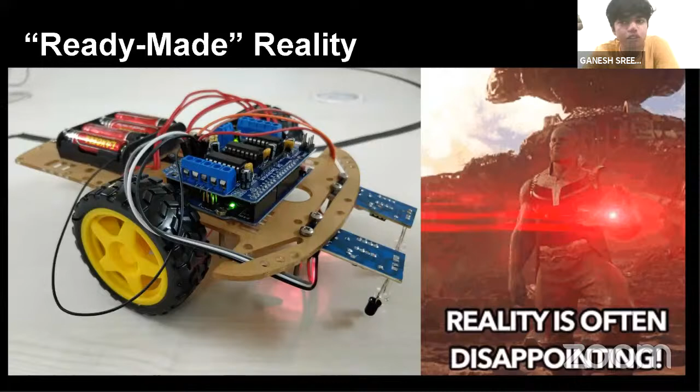But then comes the reality part, and that's the thing about reality — it often sucks. Before joining engineering, you dream about robotics, watching Terminator and Iron Man with high hopes. Once you join campus and spend 4 years learning what you love, you end up making a line follower robot, which is actually something you should be making at 12 years old, in 6th grade.

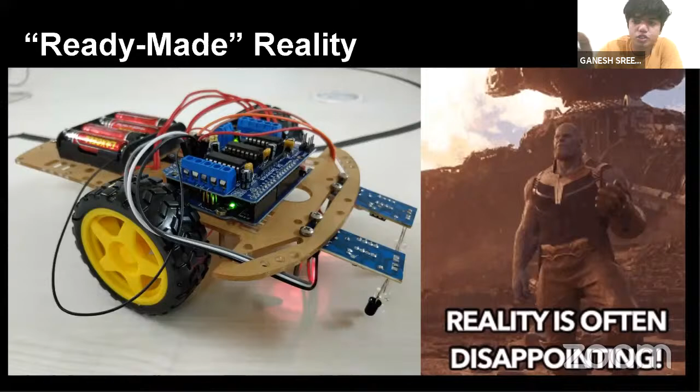Since I have all these pop-ups from Zoom on the right side of my screen, I want to make sure that's not visible on anyone else's screen. Jijo sir, is that Zoom dialog box visible too now? I guess it's not, right? No, it's all okay.

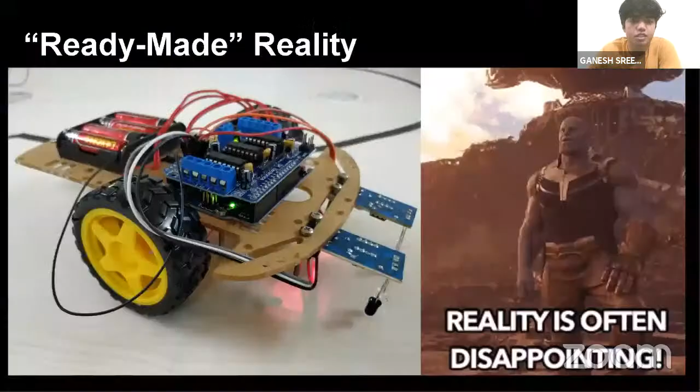I'm not saying this is the reality — I'm saying it's the ready-made reality. This is what they'll sell you when you join a 3-day robotics bootcamp or workshop. I'm not selling a program here; I don't teach robotics anymore, but I'm just saying.

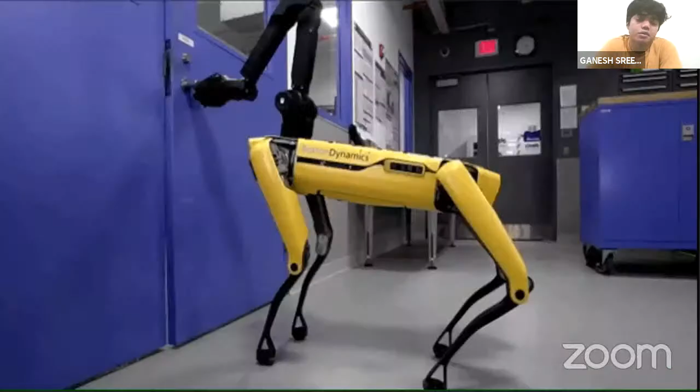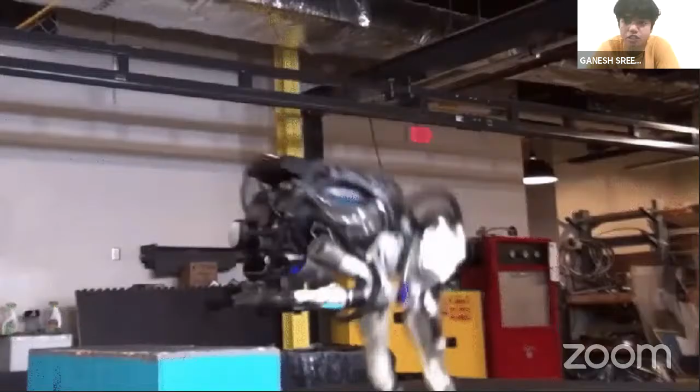There's a whole other spectrum of robotics you see on the internet — Boston Dynamics, Spot Mini, the bigger and better Atlas humanoid, and more. It involves a lot of mechanical engineering, electronics, computer science, and algorithms running in the background, with a little AI. Contrary to popular belief, it's not really AI — even Boston Dynamics robots are pretty much well programmed in ROS, and we'll get to that in a moment.

Even some practically oriented robots, like Elon Musk using robots to assemble plants, or Volkswagen doing the same for over a decade — you don't always have to look at Tesla for inspiration. There's also KUKA robots, a lot of robots coming from Germany.

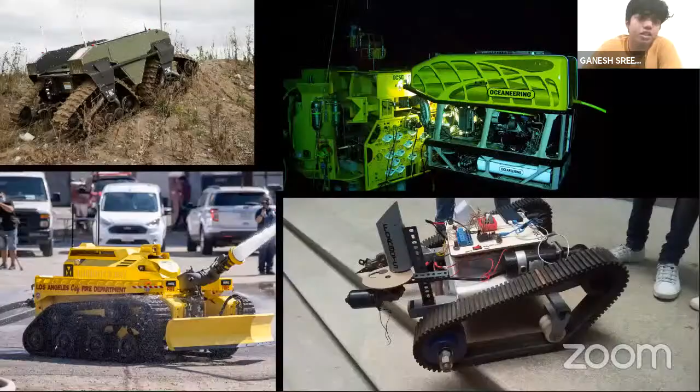Then there are unmanned ground vehicles, which is my field of expertise — the ones you see on the top left and bottom right corners. The fourth picture is actually my robot that my team developed for the first hackathon.

Most of my seniors worked on it, mentored by Dr. Sojan and Assistant Professor Robin sir, who I hope is also here in this presentation. There are also aquatic robots for underwater inspection, which is yet another domain I'm working on.

I don't plan to bore you by telling you everything I've been doing, because that's not the point of this presentation.

I'm not here to talk about general robotics, because these are the things you find online and everyone's going to talk about. So I'm just going to tell you, even if you're not interested in robotics in general, you probably need to learn it. One reason is because it's perhaps the easiest way to add a lot of skills to your armamentarium, especially if you don't have any experience doing interdisciplinary projects beforehand.

What I mean is that if you want to make a robot, you will have to solder something, learn how to design a circuit, learn how to program, and learn how to screw down a wire or rivet something together. So these are the things you want. It's all about interdisciplinary skills, and it's not as simple as it sounds. We'll get to that later on.

And the stuff you learn in classroom, you get to apply, and that's for me the best part. Because if it's not really inspiring, then who wants to learn all these abstract subjects that you learn in classroom without even once applying anything in the real world?

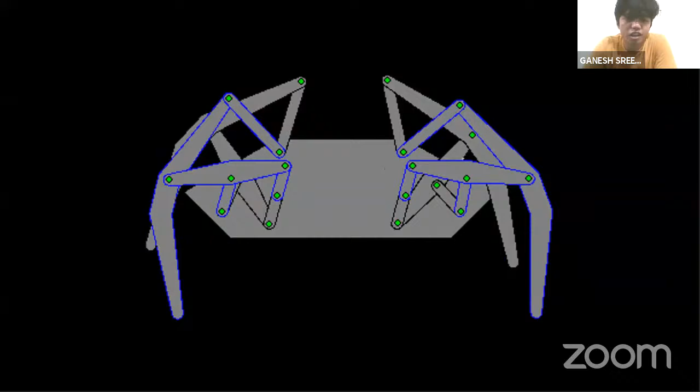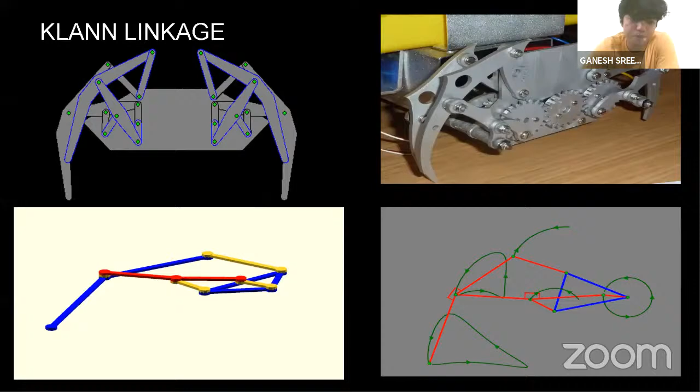It doesn't even have to be this complicated. Right here you're seeing a simple mechanism called the Klann linkage, which you will find in most quadruped robots these days—well, in the olden days. In fact, that's a single degree of freedom system. Having more degrees of freedom doesn't mean the system has to be complicated. It can be a very simple, unsophisticated system. In fact, it has only one rotational joint.

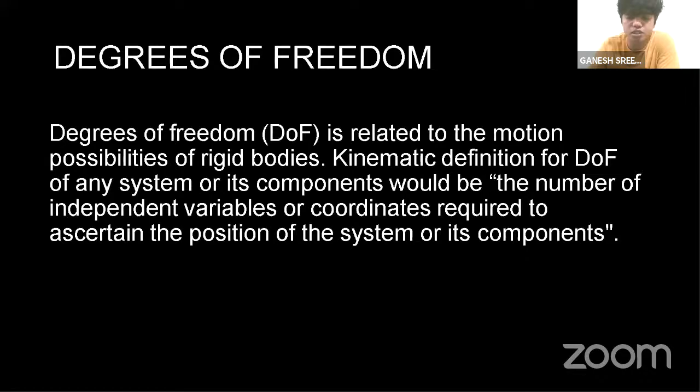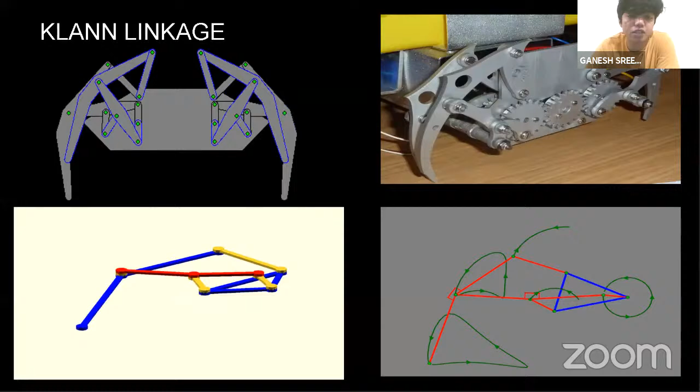So what do I mean by degrees of freedom? How many times does one thing need to rotate to prescribe the desired motion? In this case, the Klann linkage only needs to rotate about that red member you can see in the image in the left bottom corner. That's a simple mechanism.

So we are not going to talk about that. We're going to talk about how to describe motions in space, or motions of a robot, mathematically, because once you're able to describe it mathematically, you're then able to program it on a computer.

There's yet another thing I really want to point out. I don't mean to scare you off with any of this stuff. You can actually learn robotics without even worrying about all the mathematics involved, pretty much like you don't need to know image processing to use Photoshop. But if you really want to know what's going on under these codes and blocks and programs that you steal from GitHub or Stack Overflow someday, then you have to understand the fundamental theory behind how these things work.

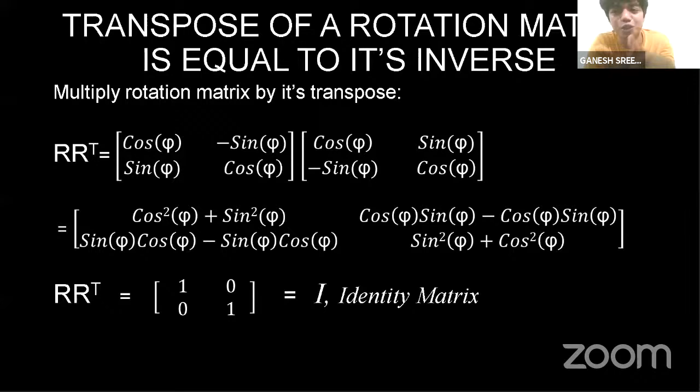So that's just a result. I mean, that's not a derivation part. It's actually fundamentally important when you code a robot. But again, that's beyond the scope of this presentation, so we're going to just skip ahead.

And we have yet another property of the transformation matrix. Once you multiply the transpose and the matrix itself, we get the identity matrix. And we know that the inverse also gives us the same. So a rotation matrix is also orthogonal, because its transpose is equal to its inverse.

So those are the properties of matrices which you actually need to brush up, which I hope you remember from your 3rd semester linear algebra course. I don't know about the first years right now, I think you guys are learning, right? First years and second years, the syllabus has changed a little.

So rotation between reference frames, it's all about matrix operations. You take inverses, you take transposes, that's all. So what I want to tell you is that, okay, this is actually supposed to be a 5-hour course, but that's not what we are doing today, so I'm just going to skip ahead.

But the point I'm trying to make is that once you know the elementary matrix operations, you can describe the motion of a robot. And how do you do it? You code it in MATLAB. And those are the things that Reshma ma'am already discussed in yesterday's presentation. And I'll tell you how to learn all these things on your own later on in this presentation.

And these are some interesting properties of rotation matrix. Its determinant is one, a lot of things. So what does the determinant mean? It's the area that's spanned by the unit vectors.

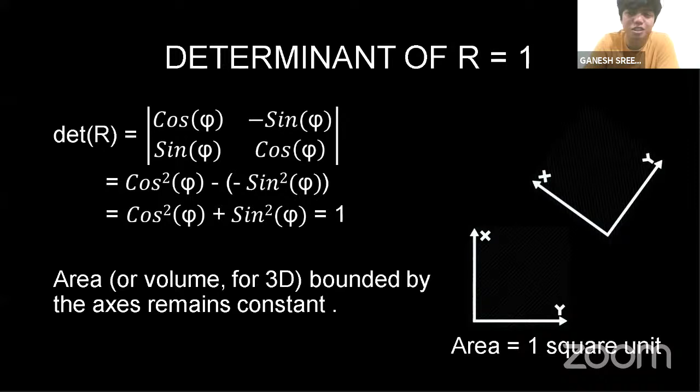But again, that's the physical interpretation of linear algebra. Those are things you don't really learn in your classroom, but you can learn from robotics. There are actually courses from Stanford University you can take to understand these things. The rotation matrix and its inverse belong to the special orthogonal group, which is yet another property of the matrix.

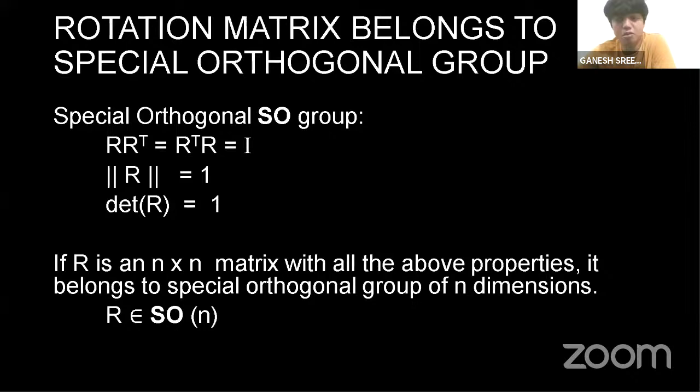There is invariance under rotation. Even if you rotate an element, its length won't change. That's all there is to it. But how do you mathematically represent it? If I'm rotating my arm, it's not getting shorter, right? Maybe it can go like this, squished and short, and as it rotates it elongates. It doesn't work that way, right? Once you rotate it, the length doesn't change.

So how do we prove it? Well, the vector's Euclidean norm remains the same. So I'm just talking about how to mathematically describe all these things.

So now we get back to the application part. How do you actually tell a robot to pick up an object? Or it doesn't even have to be a robot arm. Suppose you're making an automated car, okay? I've worked on a project, an amazing project by my seniors, and I've been lucky to be a part of it. I was the guy in charge of the automation part, but I wasn't quite successful in making the car autonomous. I ended up relying on image processing and stuff.

But how do you make a car autonomous? Well, it's not a solved problem yet. Even Elon Musk can't seem to do it yet. Well, one of the ways is that you know the relative position between the car and the destination. Then you think of all the possible ways you can reach the destination and choose one.

So how do you make a robot arm do the same to pick up an object using camera data? You've got to know all the velocities in relation to each other, right? And you can always transform between reference frames. Even if you rotate a reference frame or move a reference frame, you can still find the original coordinates by applying an equivalent matrix transformation to the distorted vector itself. And these vectors do not actually change in magnitude, so you can be confident about the results that they yield.

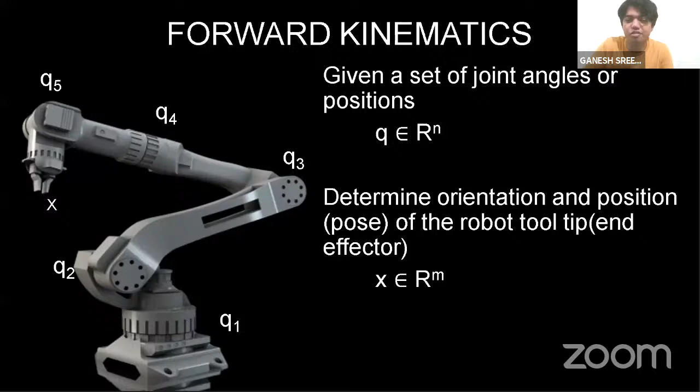And if that's the case, there's actually something called... okay, we will get to that. So we need to determine where the robot is, right? So suppose we have a number of joints, and we need a number of possible orientations or degrees of freedom.

We can represent all these things as vector transformation. So there can be multiple types of joints. There can be single joints, like my wrist is an example—it can only rotate this way. My elbow is an example—it can only rotate this way. But there is a ball and socket joint that can roll, pitch, and yaw. My shoulder is an example for that. It's got mobility in all three planes, right—XY plane, YZ plane, XZ plane, all the three mathematical planes. Rotation about all the planes is possible.

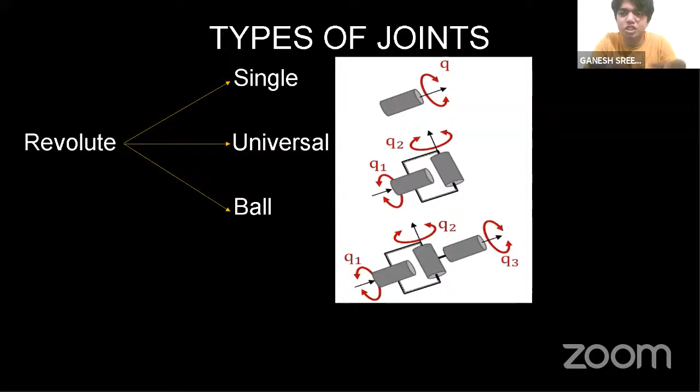And there are universal joints, something like this, that you can transmit rotation at an angle. The universal joint is actually the kind of joint you see under buses and trucks. If you're into automobiles, you know what I'm talking about. But yeah, robot joints can be many types. Then there can be prismatic joints, the ones that expand and contract, simply move forward on that.

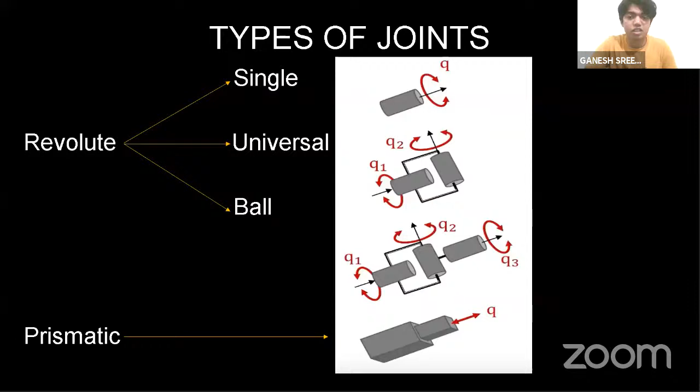So how do you get to reach a point with all these things? Well, you can define the task space and joint space. What is the task space? Task space is the number of degrees of freedom a robot needs to have to do a particular thing. And what's joint space? Joint space is the number of joints you have, simple.

I'm just not going to go through it in detail. If you know the length L1 and L2, and if you know the angles Q1 and Q2, then you can use L1 cos(Q1) plus L2 cos(Q1 plus Q2)—those are the angles, sum of the angles, and the length. So you can basically find the projection on the x-axis and y-axis, and if you know those projections, you're basically getting the coordinates on the x-axis and y-axis.

So you can basically know the position of a robot from the position of its joints. And it works even in three-dimensional space, but it's going to be much more complicated—the trigonometry involved will also include a lot more components. So that's it, forward kinematics is all about finding coordinates based on joint angles.

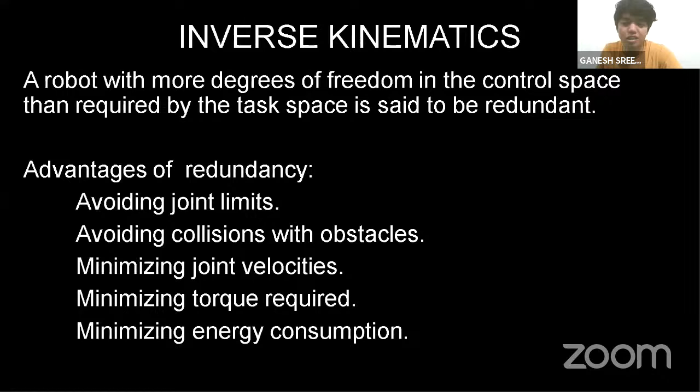Energy consumption is a little bit indirect, but it's still a manifestation, which if you're interested, we will talk about. But as of now, we are not talking about it.

So with more degrees of freedom, forward kinematics is always possible. And even in inverse kinematics, the analytical or closed form solution is impossible. I mean, in some cases it's possible, but it's awfully difficult. People won't do that. But instead, we can use some mathematical tools.

That's where the mathematics comes in. Mathematics, calculus, whatever you're talking about, it's not here to make your life complicated. It's here to make your life easier. So what do we do? We use gradient descent, maxima, minima, first derivative, second derivative, directional derivatives, Euclidean norms and stuff, to actually find the minimum of a function.

The joint space is actually the inverse function of the coordinate space, which is an element subset of Euclidean space. So there are two options, like we discussed: the closed form solution and mathematical optimization. There's a finite number of solutions if the task space equals joint space, M=N. But if the joint space is greater than task space, if there are more joints than you want, then there's going to be an infinite number of solutions.

Actually, it's always good to have multiple joints because, as we talked about before, redundancy. But that's not always the easiest way out. So we need a different form of solution called inverse kinematics by optimization, which we're going to talk about.

So we're going to define an error function, which is the difference between the desired coordinate x and the current coordinate, f of q. We've seen that the current coordinate is a function of joint space, so the current x value can be represented as f of q. The difference between the two, and the magnitude of it, will be given as the error function, and we need to find the minimum of this error function.

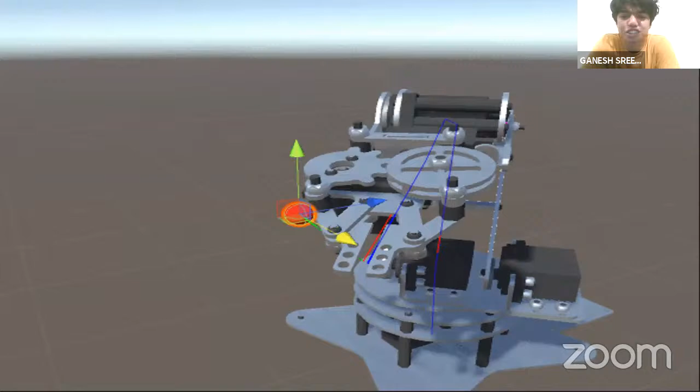So this is actually a screen recording from Unity. This is an old project of mine which I only designed, I didn't make it, and my teammates know it because I abandoned the project. I wanted to do it with Viper motors, but I couldn't find the files for that because Unity isn't customizable beyond a point, so I had to use industrial servos and stuff.

But that's why you need to know how to code these things with the mathematical construct. Then you don't have to depend on any library, you can build up the code from scratch.

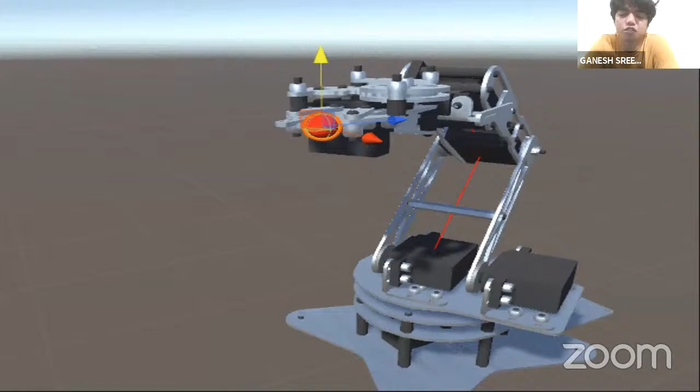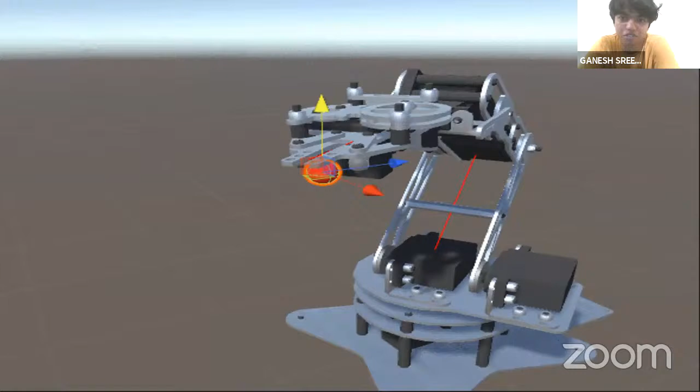And especially it's better if you have teachers that support all these things. I've been very lucky that my department, mechanical engineering, supported me a lot, and even the electrical and electronics department, because Johny sir and his team, the HOD, even the electronics HOD—because I actually wanted to take up electronics, but I stayed in mechanical, and looking back, that's the best decision I've ever taken. That's partially because of Ebinson sir, because he told me, okay, you can stay here, and the principal too, and a lot of things, but that's it.

So I think we still have about 20 minutes to go because I was told it's a 2-hour session. So again, you're going to be sleepy, and if you're not already sleepy, then you probably have something wrong with you fundamentally. So, if there's nothing wrong with you, we can go with the Q&A session.

You can basically ask a question that you have. It doesn't have to be about robotics. You can even ask me stuff like, if you're a first year student and you don't even know where the office is, you can ask me that. I don't know how it works. People find their soulmates in the first month, but they don't find the toilet in 4 months. I pointed that out yesterday, but yeah, so there's a kind of thing. You can ask me anything, but I would highly appreciate if it's about robotics.